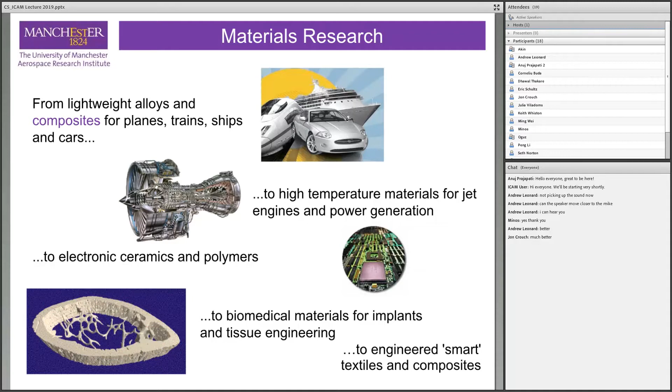For those not familiar with composites, I have to say a few things. Composites bring the properties of two or more materials together. So any two materials—metals, ceramics, polymers, elastomers, glasses—could be combined to make a composite. They might be mixed in many geometries: particles, chopped fibers, woven, unidirectional, and laminate composites, where you design and build layer by layer, creating a system with a property profile not offered by any monolithic material.

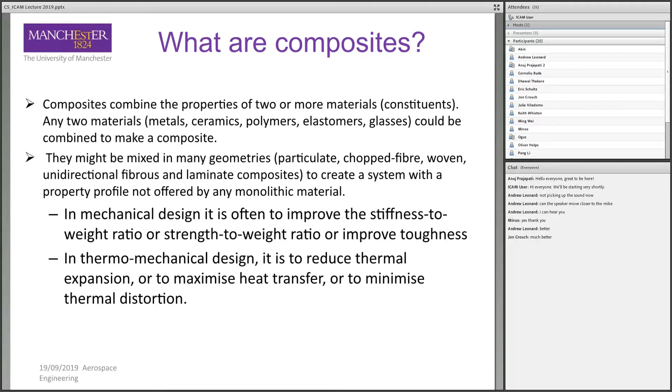So for instance, in mechanical design, it is often to improve the stiffness to weight ratio or strength to weight ratio, or improve toughness, while in thermomechanical design, it is to reduce thermal expansion, maximize heat transfer, or minimize thermal distortion. Of course, you can always design and tailor the electrical conductivity of these material systems.

So layer by layer material engineering: we start with carbon fiber. It can be in a unidirectional pre-preg format, or as a woven fabric, mixed with resin. Then we can build multi-layer constructions to satisfy certain criteria, based on stiffness, strength, toughness, thermal or electrical properties.

But what are the benefits? Most of us are familiar with composites, and the main reason, especially in aerospace, is weight saving compared to traditional aluminum alloys. They provide high strength and stiffness. We can tailor directional mechanical properties. We can create complex shapes and contours. But the most important aspect is that it enables you to reduce part count over the metallic equivalent.

You can reduce machining effort. They do not corrode and behave well in aggressive environments. They can provide excellent fatigue resistance. Composites people, of course, claim that composites do not fatigue, but I'm sure that everybody fatigues, so composite systems also fatigue—we'll talk about that later on.

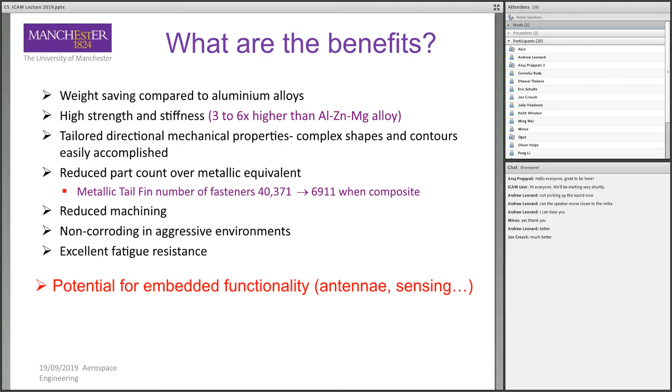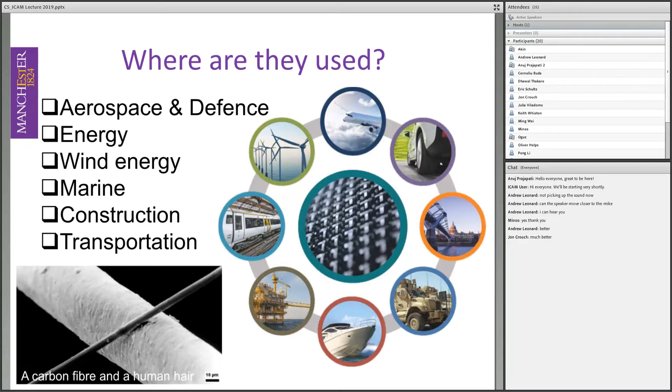Where are they used? In aerospace extensively, energy, marine, construction, transportation. But if we look at commercial applications, we're going to see that these material systems are relatively new. The first commercial application appeared in 1983, when Dunlop produced the first carbon fiber tennis racket. A few years later, in 1995, McLaren built the carbon fiber composite frame Formula One car. I want you to remember those dates, 1983 and 1995—I'll ask you questions later on.

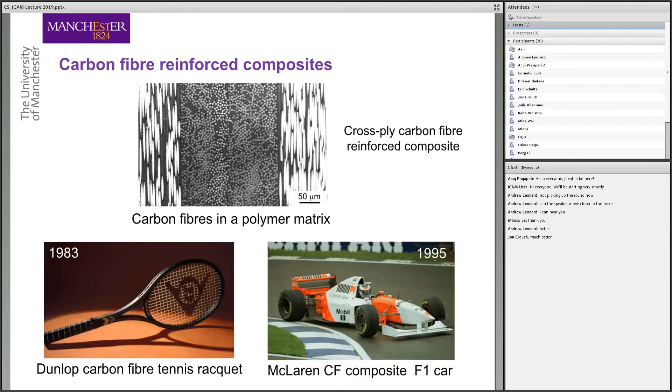If we look at aircraft applications, fabrication of modern aircraft, composites do enable us to innovate. Here we can see the winglet of the Airbus A350. It's about 7 meters long, and made entirely out of carbon fiber. It could be made out of metallics, but that could be too heavy.

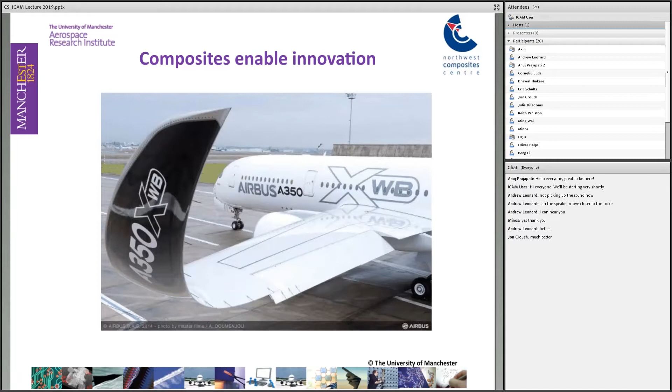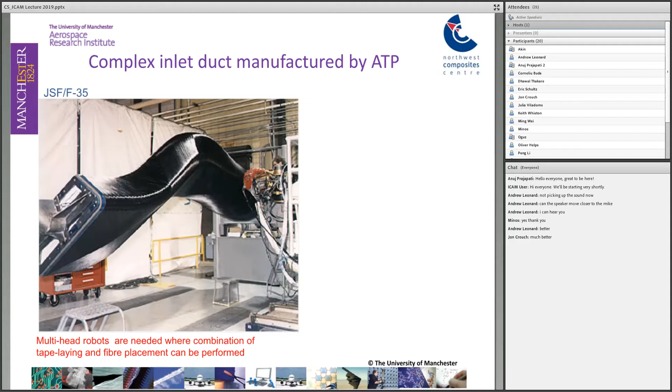So the 787 is the industry's first composite wide-body jet. That's an example where composites don't fatigue as much as metallics. But of course, as we said, everything fatigues.

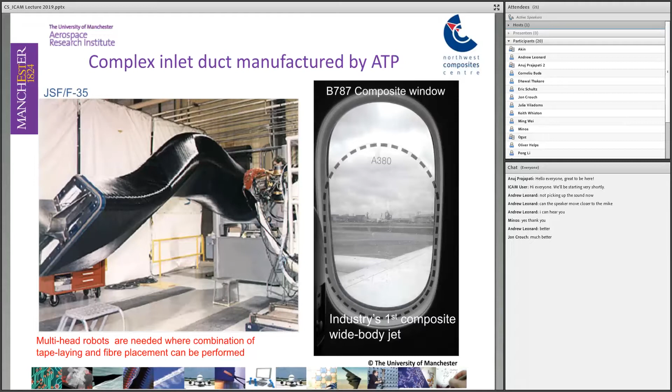Delamination is separation of neighboring plies. And if that laminate is loaded under biaxial loading, then you're going to see that matrix cracking or splitting starts to propagate in the zero layer.

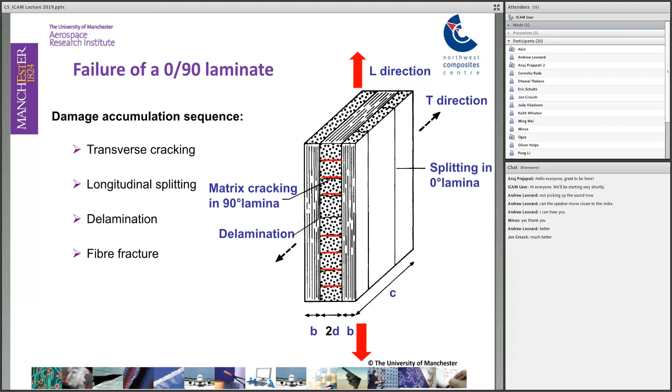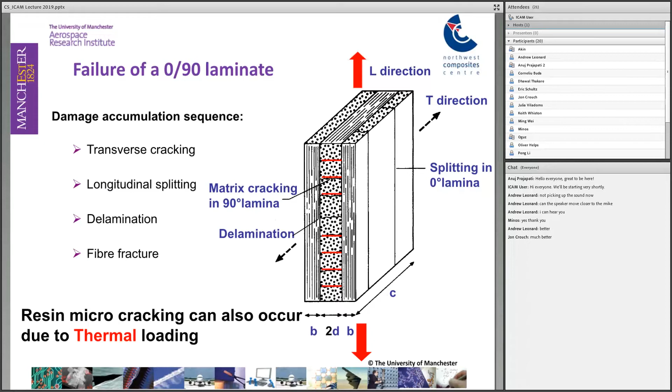This type of resin microcracking can also occur not only due to static loading or fatigue loading, but also to thermal loading, or a hygrothermomechanical combination of loading, something that an aircraft experiences when in service.

So the damage mechanisms under tension are in the form of matrix cracking that causes degradation of the overall stiffness properties of the laminate. And that triggers development of other damage modes: delaminations and fiber breakage.

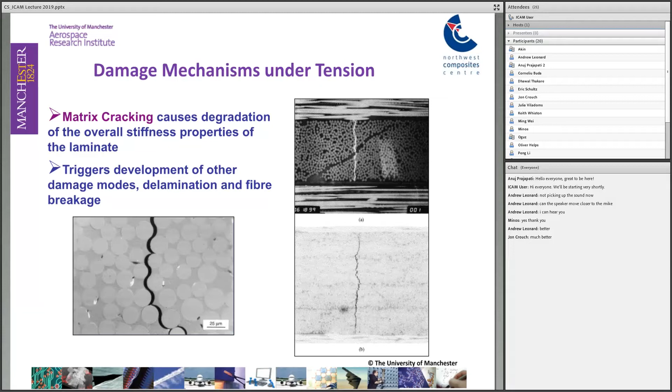Our community then puts effort into developing analytical models that can describe the effect of all these damage mechanisms on the performance of the composite structure.

Something happened here to some of these images, and some distortion took place. Maybe they have fatigued as well.

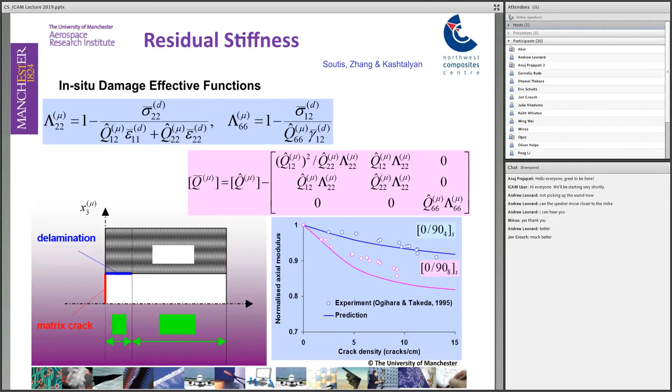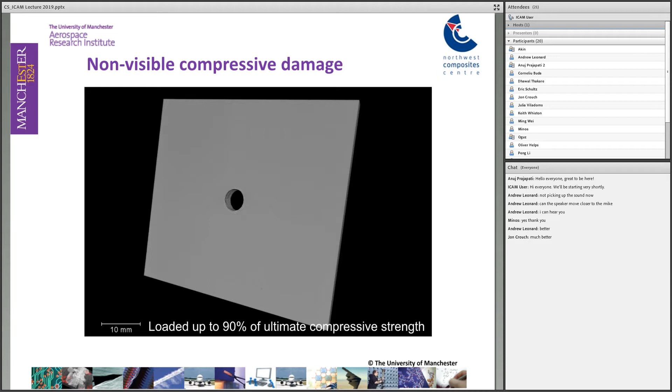The only way we can observe this is by using X-ray CT, computed tomography, where we can see some axial cracks growing by the edge of the hole, some off-axis matrix cracking in the plus and minus 45 layers, and extensive delamination between those plies.

But that image there has failed to identify, on the left-hand side of the hole, under those delaminations, there is a critical damage mode in the form of fiber microbuckling that we cannot see and have failed to detect.

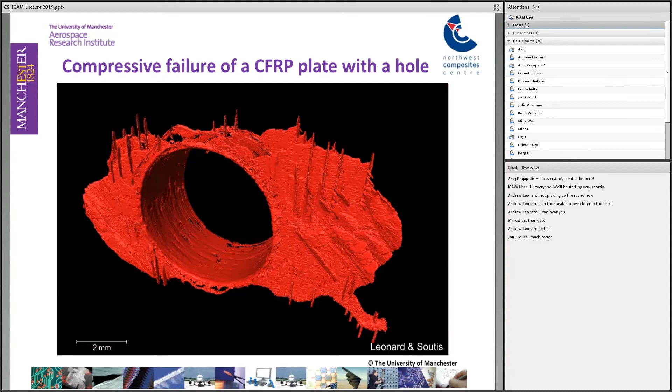If we go to SEM, scanning electron microscope, we're going to see that crack is in the form of fiber microbuckling in the zero plies, which carry the actual loading.

Those microbuckles are a fiber instability failure mode. When it reaches a critical strain, they break and the crack grows in an unstable manner, causing catastrophic failure.

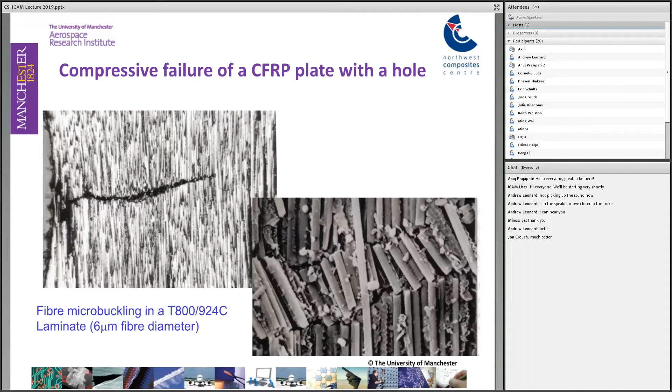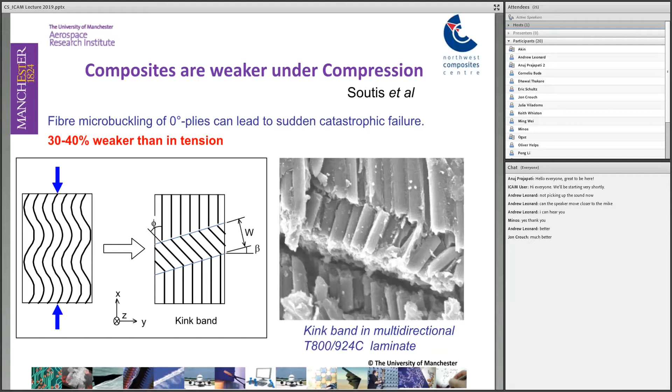There is effort to develop analytical models that will enable us to estimate the critical stress in the zero layer that's going to introduce that fiber instability, taking into account the initial fiber waviness, the fiber volume fraction, the properties of the fiber and the matrix, the entire non-linear response of the resin, and also the interlaminar shear stresses that develop between neighboring plies, which can also introduce additional instability in the zero layers.

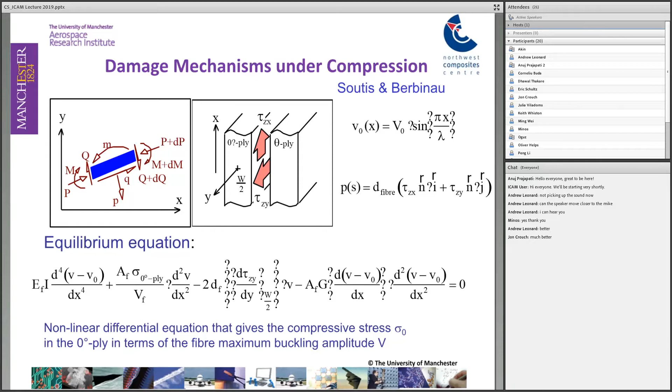The effort now is focusing on how we can identify those critical damage modes that take place inside the component non-destructively.

But much more work is required. We have some new arrivals today from Napoli who are going to put effort into that struggle to identify suitable methods of non-destructive evaluation of composites.

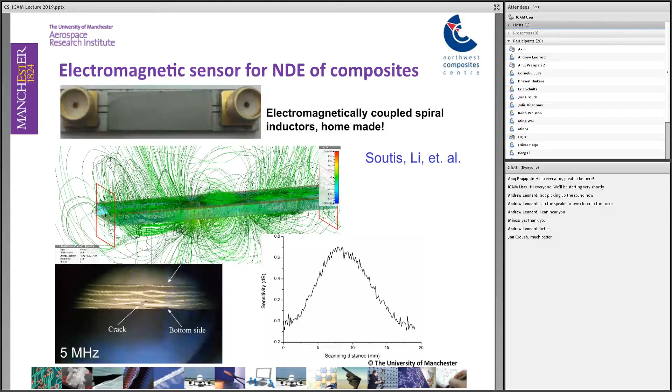So we spoke about the non-visible damage, not visible damage, but what about the damage which we get from other sources, say low velocity impact or a bird strike impact?

Here, of course, the task is not so much to identify the damage, because we can see it without any sophisticated method, without an X-ray or X-ray CT or electromagnetic sensors. But the task here, the challenge, is how to fix it, how to repair it, without actually causing additional damage during the process.

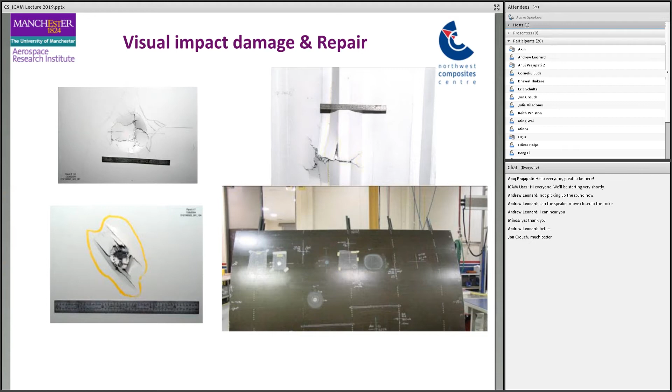So then the community put effort into trying to identify ways of making composites more resistant to damage. Of course, eventually they will get damaged, damage will occur, but how can you delay it? One way that composites offer us is hybrid composite laminates.

But if you look at the construction, it's been optimized for strength and stiffness, while the pure gold, the softer material, provides a bit of toughness. So the spear cannot break the shield in a brittle manner, and at the same time cannot penetrate.

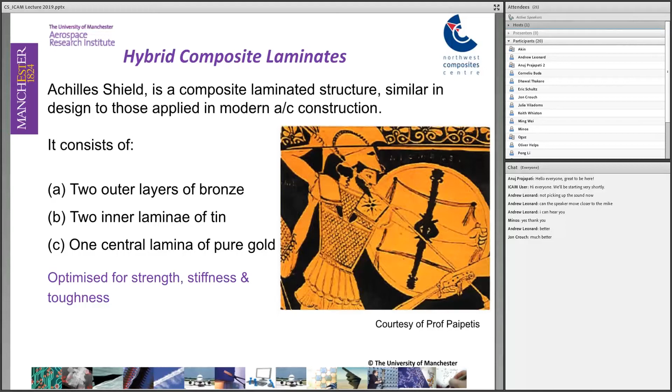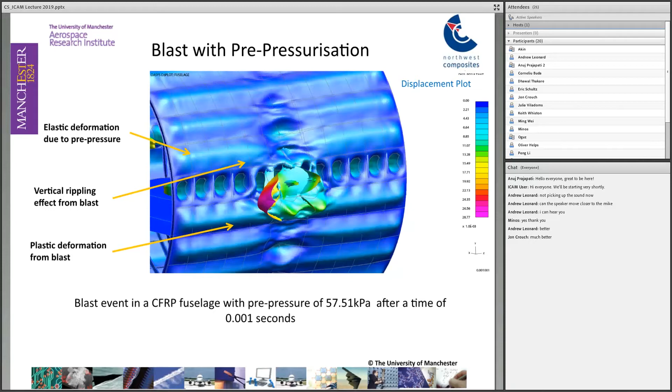So based on this principle, we can see the carbon fiber composite on its own under a blast event in a pressurized aircraft cabin, where we can see a big hole is created, and we don't want that. We don't mind getting damaged, but we do mind getting perforation.

And if we compare that with a fiber metal laminate under a high velocity impact, we're going to see that the aluminum layer in this case has absorbed all the energy from the blast. Yes, we have inner damage in the other layers, but we managed to avoid perforation.

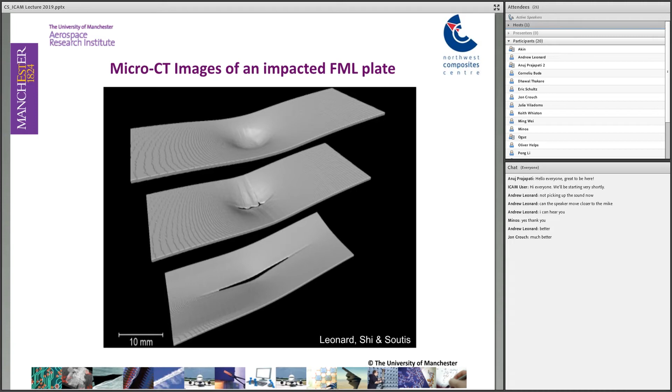Another way of achieving toughness and preventing early damage in the form of matrix cracking and delamination is if we can mix different fibers together. In this example, for instance, we have glass fibers that provide the strength and stiffness in our construction, mixed with polypropylene fibers that provide additional toughness in our composite system. They make it harder, they can sustain higher strains, they can make it harder for the composite to get damaged.

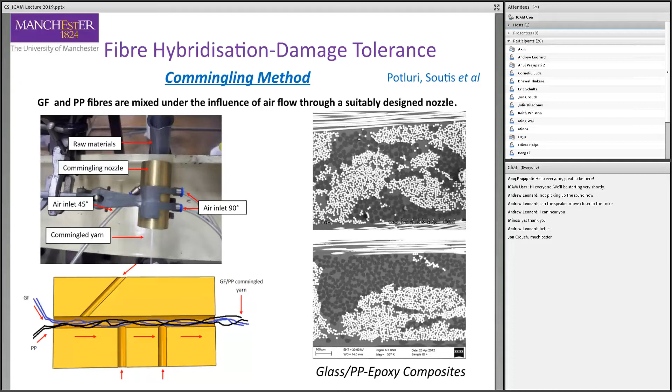Eventually, it will get damaged, and under an impact event, you will have the same damage modes, matrix cracking and delamination and so on. But now the composite enables you, if you hit it, to melt those polypropylene fibers. They can fill those cracks, matrix cracks and delaminations. And then when you look at the tensile strength after impact, we have recovered quite a lot of the original strength of the laminate.

The third option that we have with composites in the effort to improve damage resistance and make them more damage tolerant - of course, damage tolerance means that you can still perform your task in the presence of damage - is three-dimensional reinforcement. 3D woven fabrics provide us with the ability to delay or prevent those delaminations.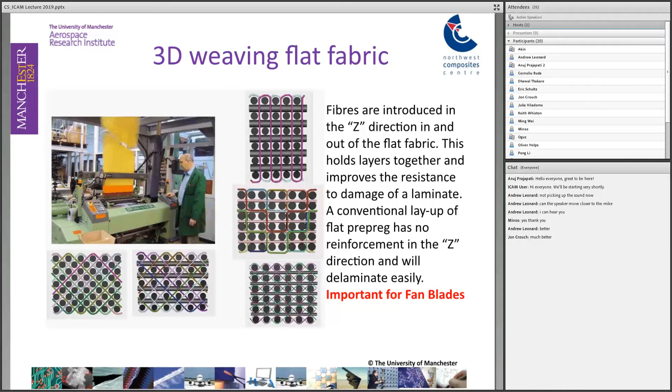Under an impact event, we can compare the two-dimensional fabric under the same impact conditions with a three-dimensional one, where all the delaminations have been prevented. Extensive delamination develops in the two-dimensional material, but not in the 3D. Of course, there is very little you can do about the broken fibers. In both cases, we have broken fibers, but we don't have the same amount of delamination as in the two-dimensional fabric.

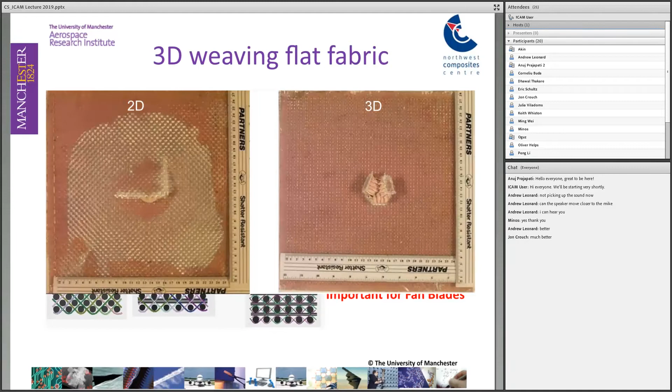So here, what we can see is that we have removed material from our plate in the form of damage, and that damage doesn't affect the tensile behavior. It affects very little the stiffness, and it doesn't affect the ultimate strength and its ductility. So some progress has been made there.

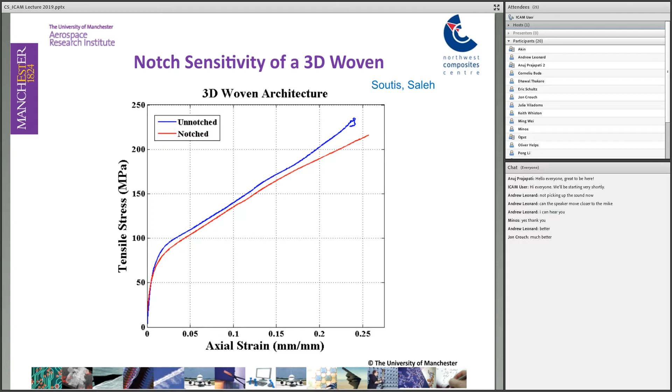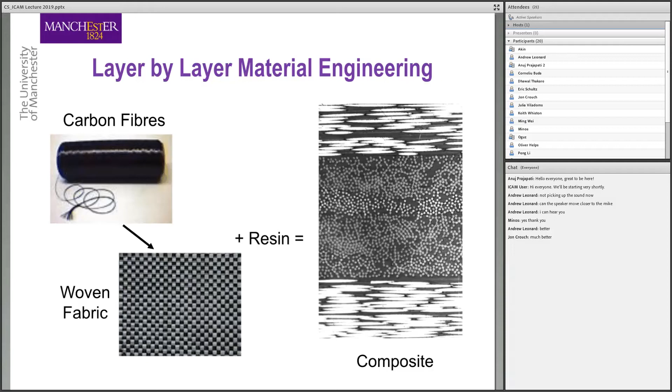So we spoke about this layer by layer material engineering, where we have the carbon fibers or the woven fabrics mixed with resin, and we try to find ways of making our composite construction more damage resistant, more damage tolerant. The final way of doing that, since we come from Manchester, we're going to introduce a magic ingredient in the form of graphene. So instead of using the 3D fiber architecture or the hybridization, we try to modify the resin and make the resin tougher with graphene particles.

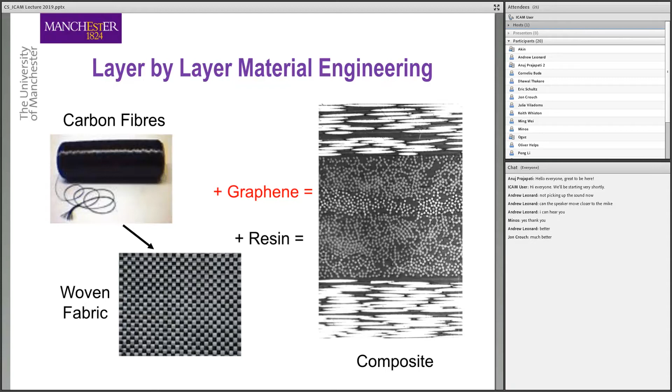I'm sure many of you are familiar with graphene and how it can improve composite performance, how it can make our composite more damage tolerant. But I think the area where graphene can give us many advantages in our composite fabrication and construction is electrical functionality, high temperature tolerance, and electrical conductivity.

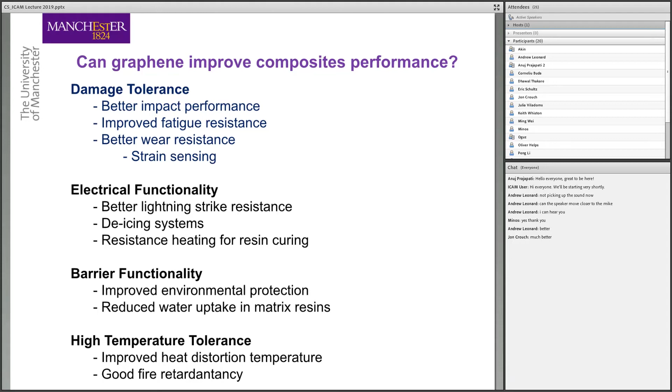But before doing that, let's see what is graphene. It's a multifunctional nanomaterial additive for polymers and composites. It's a two-dimensional material, one atom thick, with some

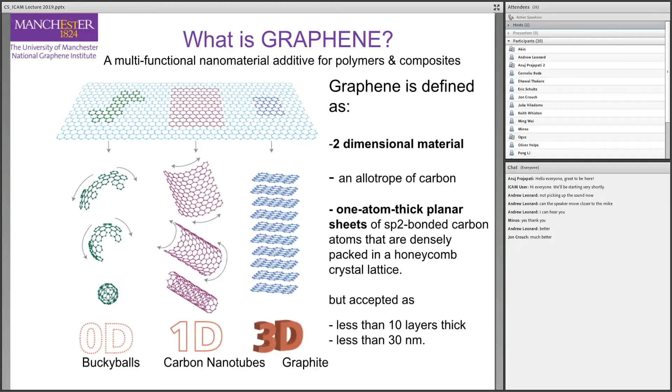superb properties. We claim that it's the thinnest, the strongest, the stiffest, the most stretchable. There's a long list of good things that graphene can offer us.

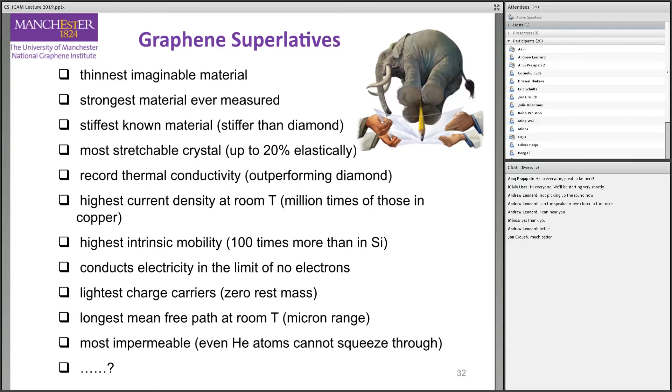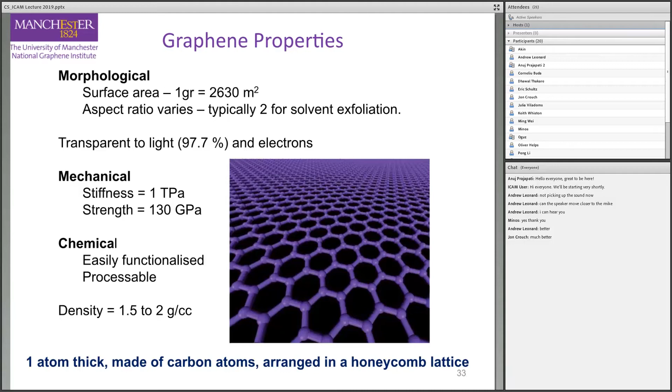And if we look at the stiffness, it's 1 terapascal with a strength of 130 gigapascals. And of course, always the question is how you can measure those properties, how you can achieve those properties.

And here we can see a graphene platelet where we test it with the atomic force microscope with a nanosensor at its tip, and we derive the stress strain response and measuring the Young's modulus of over 1 terapascal with a strength of 130 gigapascals.

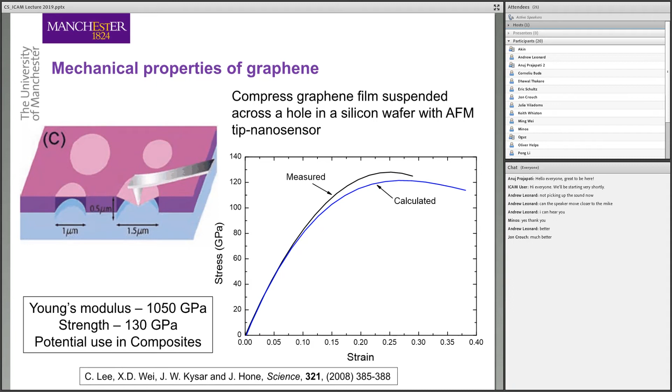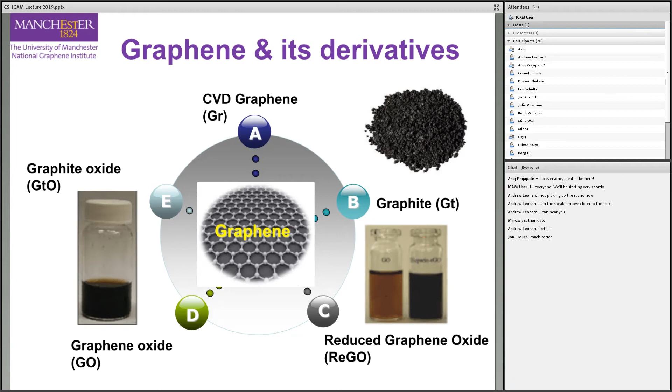But of course, the question is, in order to achieve those properties, your graphene has to be very pure. There are many derivatives. It can be graphite, can be reduced graphene oxide, or graphite oxide. And those other substances might not have the same performance as the graphene that you were supposed to use in the first place. And then the other big challenge is how you can manufacture graphene, how you can make graphene.

There are, of course, the two approaches, the top-down and bottom-up. Top-down, production by removing elements from a large starting material, or the bottom-up approach, where you assemble a nanostructure from smaller elements.

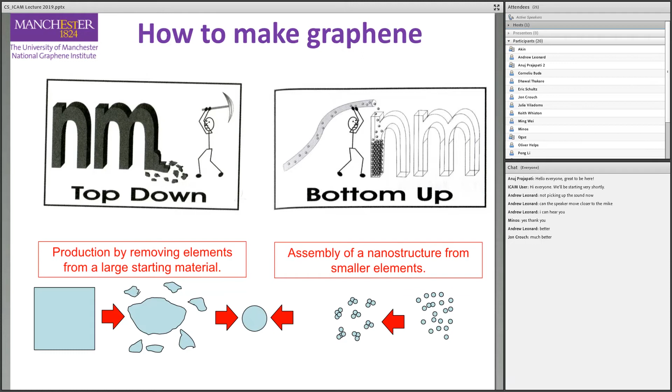So you can use the electrochemical exfoliation technique, or the chemical vapor deposition. And of course, both methods are supposed to give you the same material with the same performance. But we know very well that during the fabrication process, many things can happen, and the purity and the performance of the final material might not be the same.

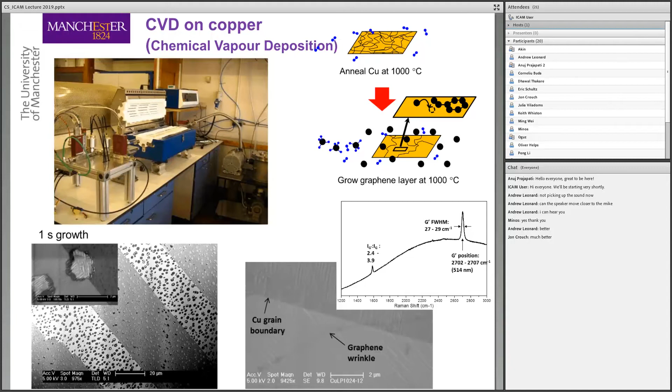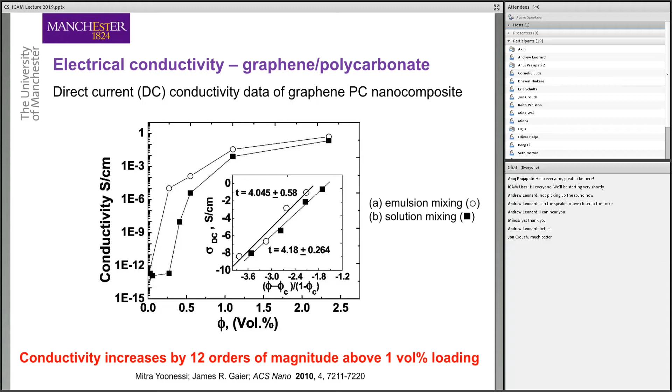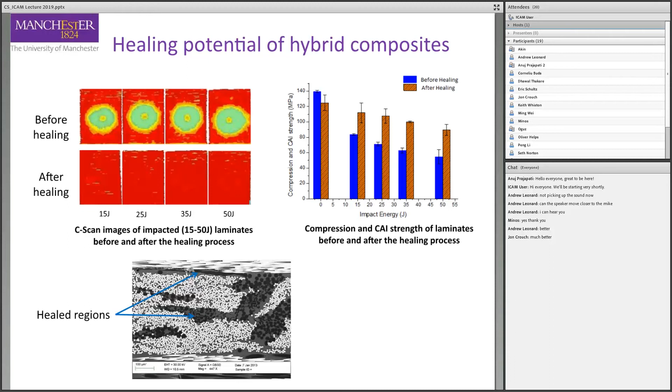We spoke earlier about the healing potential of the hybrid composites, where we had the plate under impact, where we managed by heating to repair the resin cracks and the delaminations. And of course, if we have graphene in our resin, then graphene will increase dramatically the thermal conductivity of the epoxy resin and speed up the healing process.

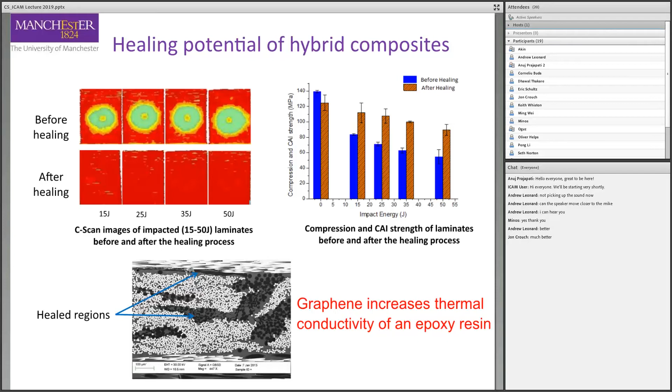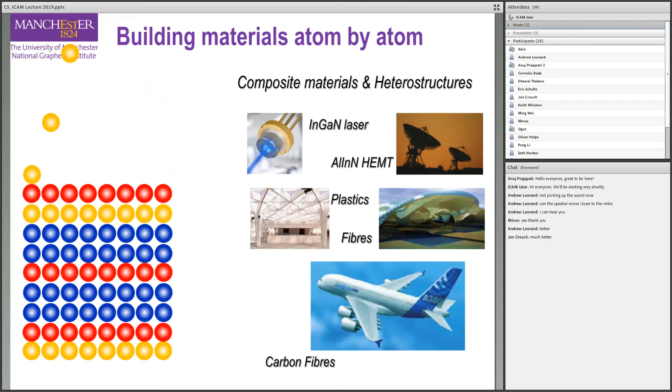And ideally, when you build material systems, you would like to build the material from scratch, atom by atom engineering. And that will enable you to build in functionality in your multi-layered system during the material production. And somewhere there, you might have a layer that can be your sensor, a few layers that they can be your transistor, and it interconnects the whole system.

And further down, a few layers that can act and provide the mechanical reinforcement, give you the strength, give you the stiffness. And somewhere there, you could have a solar cell that is going to generate the energy in order to run all this heterostructure and perform in a way that metallic materials cannot do.

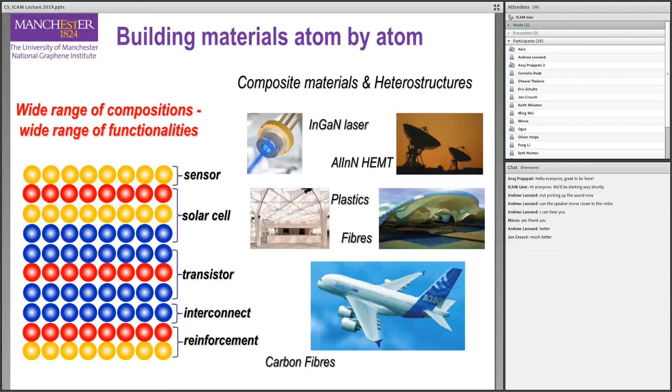And once you have this kind of material system, then of course you can have applications in high frequency electronics, sensors, flexible electronics, energy, composites and membranes.

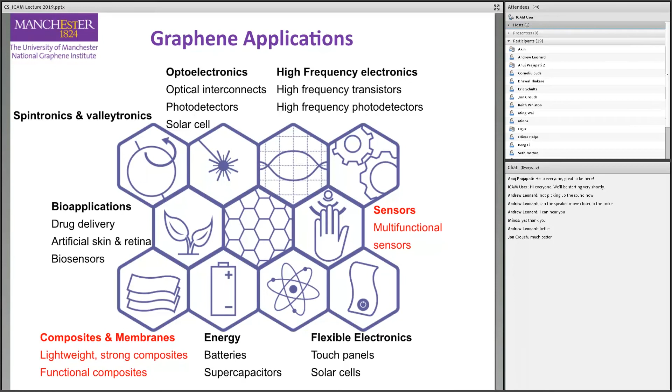You can have a graphene antenna that could give us wireless terabit uploads in 1 second. Graphene filter covered in tiny holes, just big enough to let water through, but small enough to keep salt out, making salt water safe for consumption.

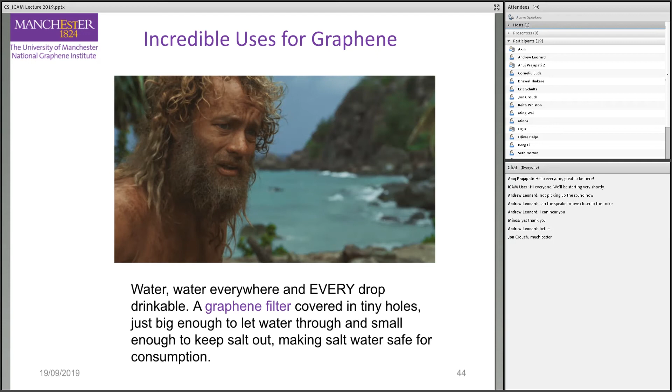Graphene supercapacitors that can fly the aerospace mini UAV forever, actually, making batteries obsolete.

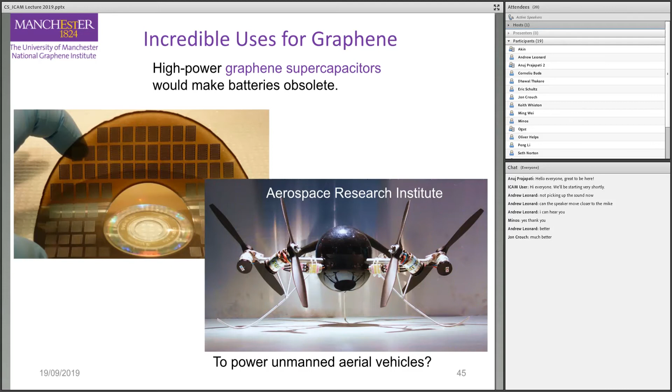And then we go back to those composite airframes like the Airbus A350 and the Boeing 787. Those structures, those carbon fiber composite aircrafts, are currently covered with a copper mesh for protection against lightning strike. Which, of course, then, by adding this additional load, you take away the advantages that carbon fiber systems offer us in the first place.

And the question is, could a conductive graphene modified epoxy matrix provide protection? Can we provide that protection during the spraying, the paint, when we paint the aircraft, and we have the graphene nanoplatelets that make the whole thing electrically conductive?

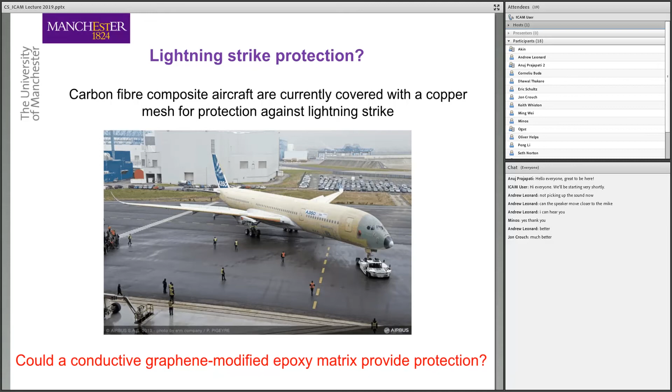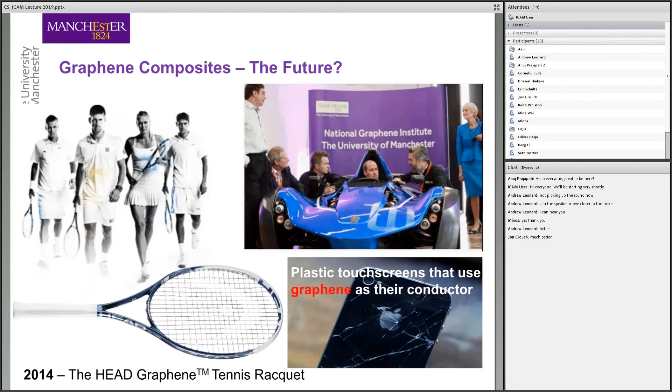Of course, we've seen composites used extensively by the aircraft industry, but the area now where composites are used extensively is automotive. And here we have moved straight away from the low production, the cottage industry of aerospace, which is a niche market, to mass production where they build millions of cars every year.

And many of those car manufacturers, probably they're not waiting for Professor Soutis to develop mathematical models to successfully predict behavior. They have already moved into building their cars - on the left-hand side there is Ford, so all the frame that supports the engine is made out of carbon fiber. Top right is the Toyota Corolla. And the bottom right, do we recognize that car? No, Josh? That's a Porsche - you can see the entire car is built out of carbon fiber.

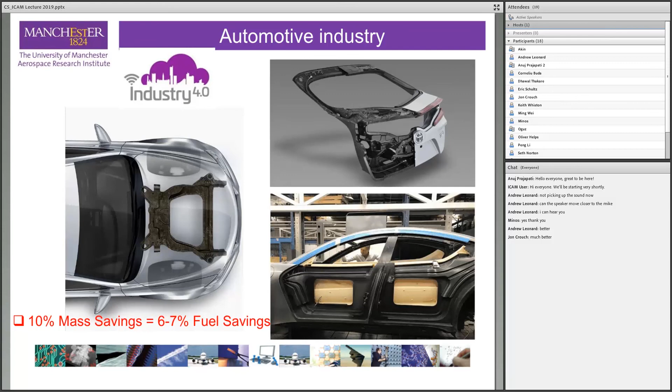But of course, when we try to introduce graphene into composites or any other application, there are barriers and challenges. We spoke already that in order to achieve those super properties, you need high quality graphene. You need to develop effective and reliable processing techniques that enable you to disperse, align, deposit, functionalize, and integrate into your composite material system. Then you have to think about scalability and affordability. There are issues with nomenclature. We have to put effort on standards, and still we have health and safety uncertainties. But above all, like all carbons, manufacturing route determines properties and cost.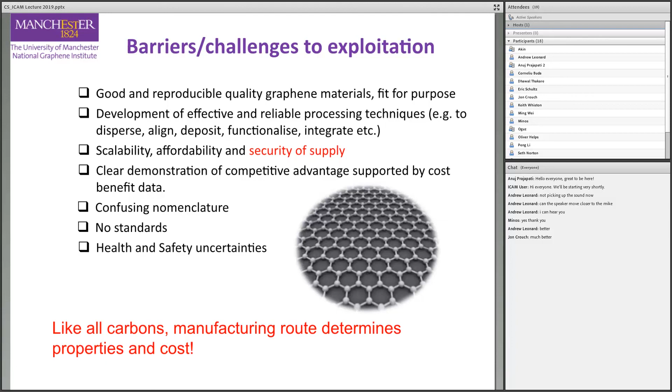Machining, drilling, assembly, joining, and repair - they remain big issues. But above all, how to design the composite strengths without treating that as a monolithic aluminum material. As you can see, processing makes 60 to 75% of the total part cost, so we have to put effort on those processing methods. And NDT and SHM of composite structures - how you can identify with confidence all that damage that takes place internally, and it's very difficult to see.

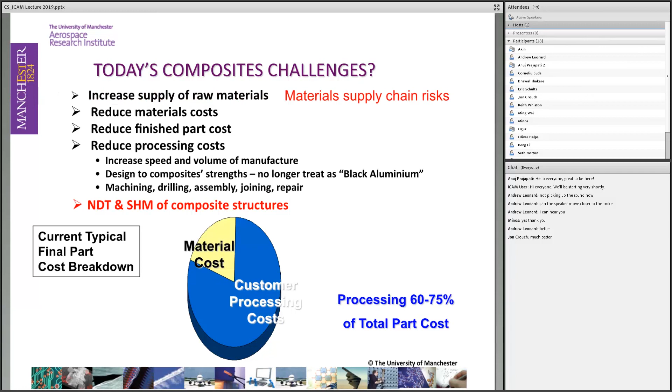And then, of course, when you try to model - the metals community have well-established failure criteria. In composites, still we don't have universally acceptable failure criteria. And then again, you have many questions: are we going to model at the nano level, the molecular level, the micro level, or are we going to smear out all the fibers and layers and do structural mechanics at the macro level? But then we're going to miss out all those damage mechanisms that take place and affect the performance.

And then in our numerical analysis, we have to take into account also the manufacturing process, because we've seen that the manufacturing process introduces fabrication defects that we need to take into account when we try to predict the strength, the stiffness, the fatigue life of the composite.